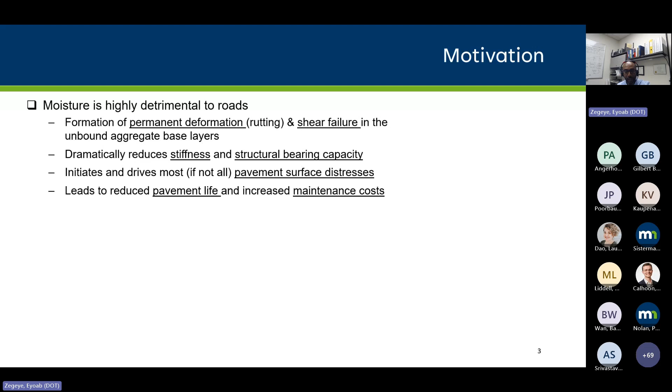The conditions that facilitate moisture damage are unrepaired surface layers, using moisture susceptible unbound aggregate materials, poor design drainage, or not very clean ditch areas. But most importantly, they are also a result of extreme freeze-thaw events, which Minnesota experiences a lot. Lately we're also experiencing a lot of heavy quick rain or flash flooding that flushes out pavement. Most of our pavements don't seem to be designed for this type of fast, quick rain, and we end up losing fine particles, with hydraulic erosion and other problems that lead to pavement failure.

When I speak about moisture damage to pavement, I like to show this video collected at MnROAD. This video is about an experiment done at MnROAD. During the freeze-thaw period in early spring, when the pavement was still in wet condition, or the base aggregate was saturated, they applied traffic loading early in the morning. As you can see in the shoulder area, there's still a presence of moisture in the unbound aggregate, and they have been applying heavy traffic on this road. This was early in the morning, and after a few passes, this is what happens to the pavement.

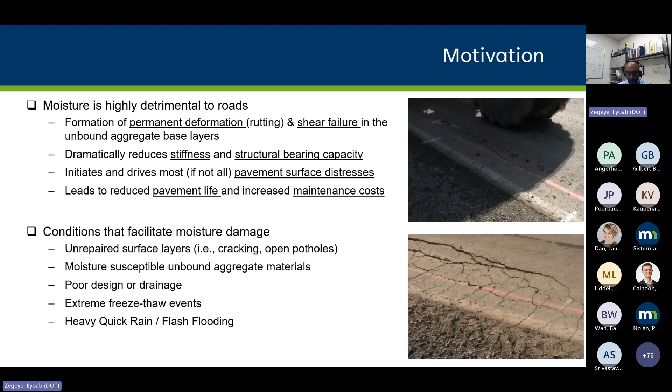When you have these issues, you need to solve the problem, maybe improve the material design or improve the drainage. But there are also some immediate remedies you can do. One is basically controlling the traffic load or restricting traffic in these conditions.

This traffic restriction plan could be periodic. For example, in Minnesota we have the spring load restriction in early spring, in the last two weeks of February or first two weeks of March. Or we can have a winter load increase when your pavement is very stiff - you can exploit that advantage and put heavy traffic on your road.

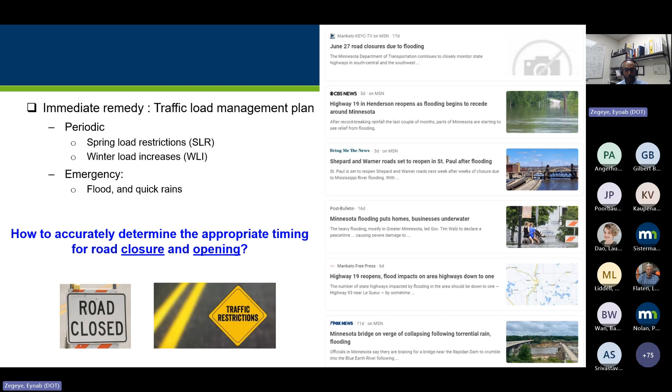But when you have an emergency like flooding and quick rains, that becomes a little difficult. When your pavement is flooded, it's easy to know when to close it, but then it becomes difficult to know when to open it. So the idea we're discussing today is how to accurately determine the appropriate time for road closure and opening.

If you close too late, you may have damaged the pavement. If you open too early when it's still wet, you may again cause damage. So this is the topic of discussion today: how to determine the appropriate timing for road closure and opening, either for periodic cases like spring load restriction, or for emergencies like flood and quick rain.

If you Google flooding in Minnesota pavements nowadays, you'll see that a lot of our roads, a lot of our local authorities, are dealing with this problem - dealing with when to close and when to reopen the pavements. With this slide, I want to share that this is a real problem that a lot of our engineers have to address.

Traditional moisture monitoring tools are in-place sensors, or drilling, coring, trenching. But these are discrete spot measurements - they don't account for spatial variation. They are very expensive to do, and you are also destroying your pavement. They require traffic closure, lane closure. They disrupt traffic and create safety concerns both for workers and drivers.

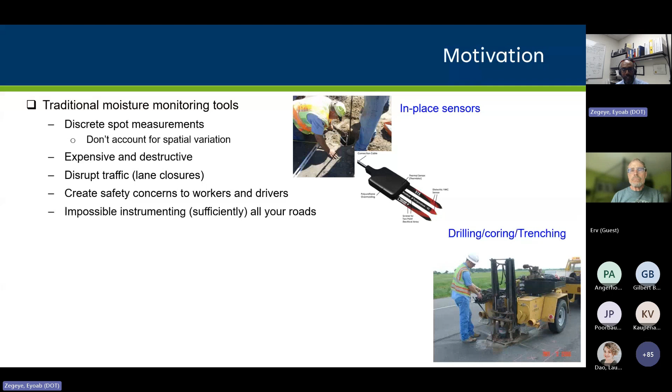As you can imagine, this is nearly impossible to accomplish on all your roads. Even if you put instruments in, it becomes very difficult to have a sufficient number of sensors in all the critical sections of your pavement. They are reliable, but mostly suitable for experimental tests, like MnROAD, where we have thousands of moisture and temperature sensors - but it's very difficult to achieve on real roads.

Because of that, we started discussing: can we use non-destructive testing technology like ground penetrating radar to assess and monitor moisture fluctuation, in this case focusing on base layers, but generally in unbound aggregate layers? Another important part is existing in-service roads - we're trying to collect data on existing roads on the top surface of the pavement, and then extract moisture information about the base, sub-base, or subgrade conditions.

Why? The benefits are, first, this is a non-destructive testing technology. But most importantly, this type of testing provides continuous information on your pavement, and can be quickly applied over long stretches. They are also suitable for repeated periodic evaluation, and they can be mounted simply on a vehicle - you can have a moving vehicle operation, or they can be done with a push cart GPR system.

In this discussion, I personally, and others too, favor the pushcart, because it's a very simple technology, relatively very cheap. Local road authorities can purchase this equipment and quickly use it without having to deal with all the other equipment and details that big vehicles like the Road Doctor bring.

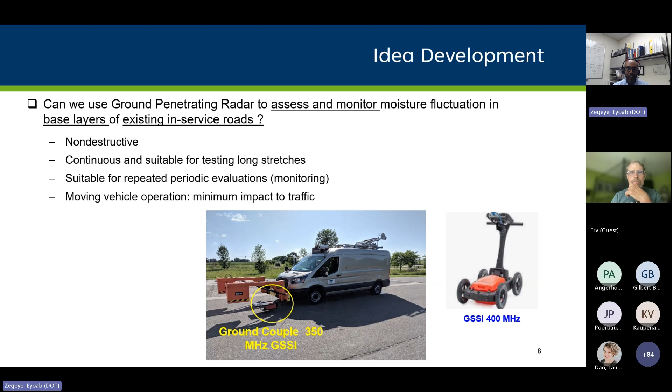So once we decided we want to investigate this, we want to conduct a feasibility assessment, we came up with a plan how to do this. The first thing we did was review MnROAD's subsurface moisture and temperature database, to learn the trends and seasonal fluctuations in our pavements. We also wanted to assess the type of data collected by our sensors, to use as a benchmark to compare with GPR information, and to identify test cells and proper time windows for testing.

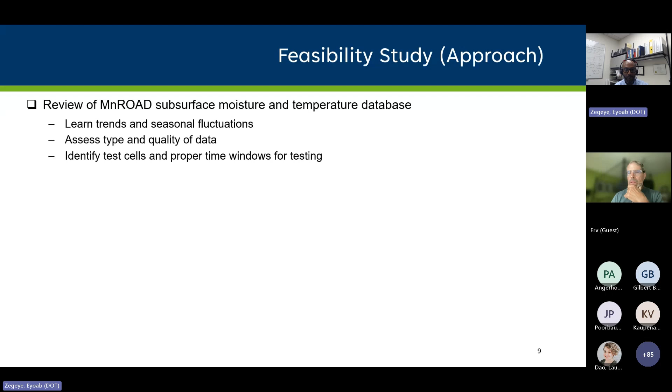Once we've done that, we moved to phase one: data collection and development of analysis procedures or tools. We collected data on different MnROAD test cells, and proposed some analysis approaches for extracting moisture-related information from GPR data. We also compared our GPR data with other non-destructive technologies, such as falling weight deflectometer, to see how GPR information can explain some of the structural adequacy of our pavements.

Finally, we did some validation with a new set of testing and analysis approach. In the second phase, we look at how we can implement this methodology on actual roads - the presentation today is part of that. We want to engage with universities, manufacturers, and road authorities to see how this can be moved into real roads.

We would like to develop implementable testing and analysis plans, connect GPR data with geotechnical and mechanical properties of the road, and finally come up with specifications and analysis tools that can help us manage traffic loads during critical flooding or spring thaw events.

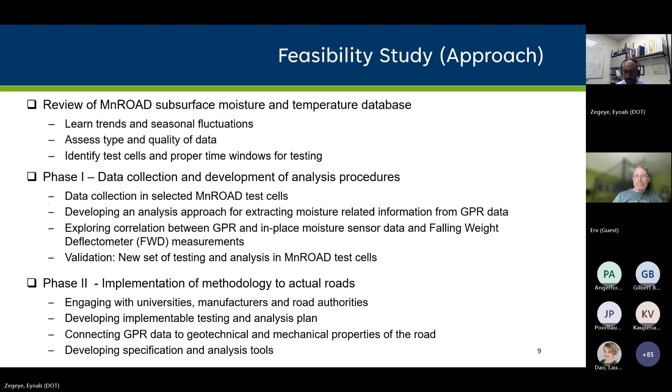So the first part was review of the MnROAD database. For those interested, we've documented that part of the study in a TRB paper. The main takeaways: we looked at data collected in MnROAD cells from 1994 to 2014, specifically at 8 different test cells with different structures.

The first thing we saw is that moisture and temperature in the subsurface follow very closely this seasonal fluctuation - high moisture content during summer, fall, and spring, but it drops almost to zero in winter. Temperature is similar. This gave us an idea of where we are.

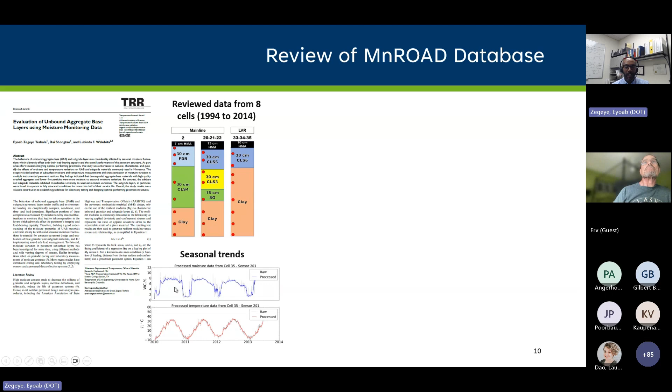From what we saw in this data, if we're going to collect data with GPR in summer or fall, that's something we can measure every month. But in spring thaw or winter, we probably need to multiply the effort. This is the kind of information we use.

The second piece of information: we accumulated all the data collected over many years and averaged it into one year, trying to see how temperature and moisture data changes with depth in the pavement. In this case I'm showing a pavement with asphalt, then Class 6 base, placed directly on clay subgrade.

One thing we saw is that high moisture levels are observed in spring and summer. But the other important thing is that the highest moisture fluctuations are observed far from the surface - most of the time at the interface between the base and subgrade.

The other most important thing is that the top pavement layer appears to warm up earlier in spring compared to the deep layer. This is important because it creates the spring thaw problem: the subgrade is still frozen while the top layer is warming up, creating a water sandwich between the frozen subgrade and the traffic load applied above, which creates a problem.

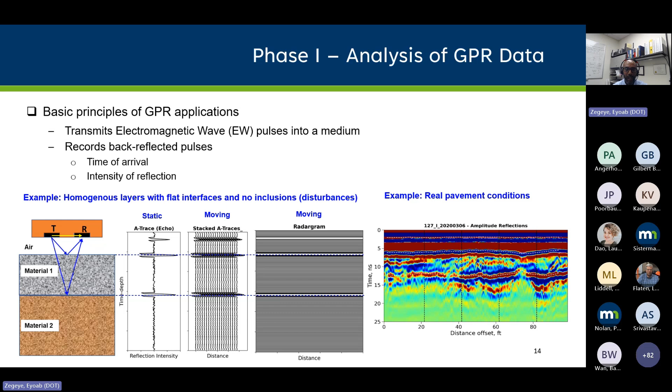In the real world, this is the type of GPR image we receive, where you don't necessarily have flat interfaces. You have a lot of inclusions and other things going on, noise that affects your data. But in any case, when we collect GPR, we are always collecting only the time of arrival and the intensity of reflection.

From that information, we can analyze the data, filter the data, analyze it in time series, in time domain or in frequency domain, and from that extract different types of pavement properties and pavement materials.

You're familiar with the use of GPR for layer thicknesses, density, moisture, and we can also use it for detecting buried inclusions like utilities or other pavement defects, voids, sinkholes, stripping, debonding, or rail tracks. These are the applications we are using on the road sector.

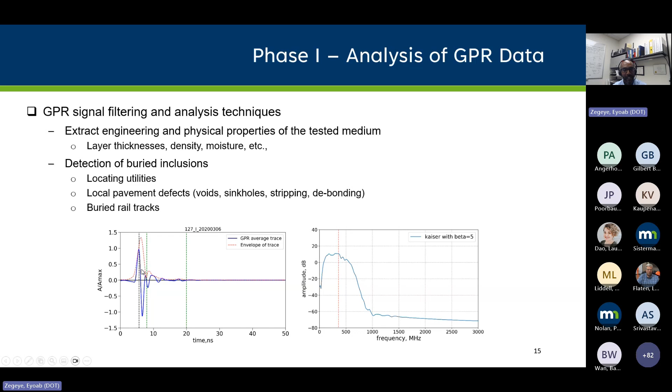So now we decide: how can we analyze the GPR signals to see the effect of moisture, or to quantify the moisture in the pavement? To do this, first we came up with some assumptions and requirements. We need to know the layer thicknesses.

In the case of MnROAD, we knew the layer thicknesses. We verified them with coring, but because this is a control section with very small sections, we knew the layer thicknesses, and we knew they could be assumed to stay constant for the entire test section. Second, we need clear, visible layer interfaces on the GPR.

The layer thickness also needs to remain unvaried between consecutive GPR scans of the same section. So what we're trying to say is that when I collect GPR data on the pavement, whether one time or repeated scans on that pavement, the only thing that is varying is the amount of moisture. Everything else remains the same.

This is the main assumption we needed for this methodology, and we do recognize that this needs to be changed when we try to apply this in a real road.

So here, for example, are GPR radargrams collected on 127 in March and in January. What you see here is because the GPR signal is very affected by moisture.

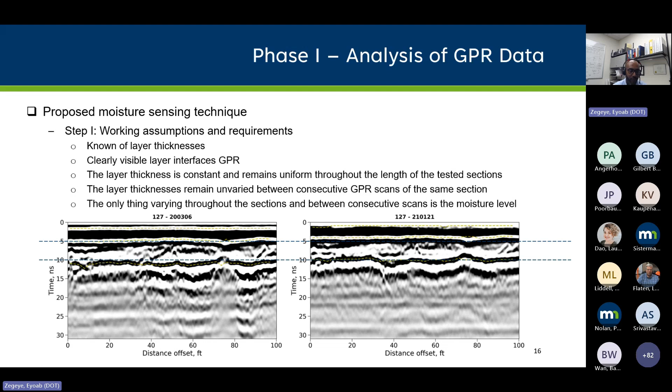So how do we do this? Basically, we created an analysis tool, in this case in Python, to analyze each of the signals collected by the GPR. The analysis consisted first of automatically finding all these peaks and troughs.

Then, because we know the user input, the user needs to tell the tool, okay, around this time window you need to find the AC interface, AC to base, or around this base to sub-base and sub-base to subgrade. So this is a user input. It's semi-automated because there is still a need for a user to specify these time windows where you need to find your interface.

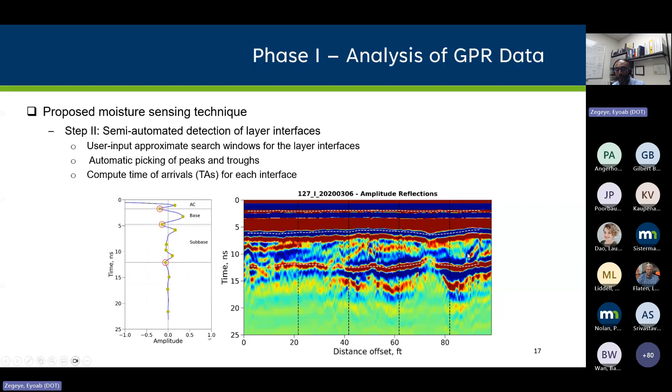But once you tell it that, the analysis tool will identify and find these interfaces. Later, Anshul will provide a demo of this analysis tool. But for now, just remember that first you need to find these interfaces, and once you find them, you get the time of arrival of those interfaces.

We also agreed that we know the thickness of the layers. So then it becomes a trigonometric problem. I know the distance, I know the time of arrival, and the time of arrival can also be written in terms of distance by multiplying the time of arrival by velocity. By solving this equation, you can come up with the layer velocity, the velocity of propagation, or how much time the signal spent in each of these layers.

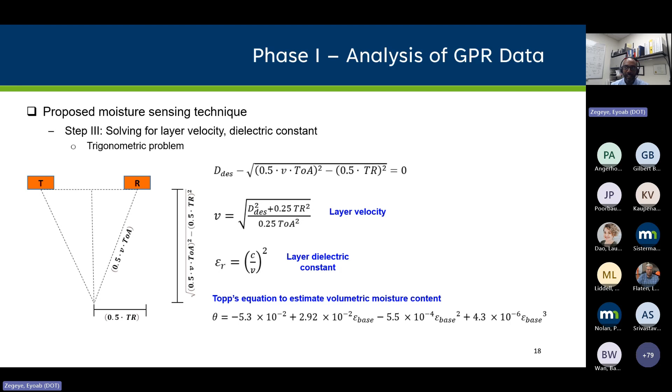Once you have the velocity, you can also come up with the dielectric constant of these layers. And when you have the dielectric, you can use Topp's equation to convert it to volumetric content. I must say Topp's equation was developed for clay material, for subgrade material. In this case, we applied it also for these unbound aggregate layers. As you will see later, it provided good results, but this definitely needs to be addressed. The Topp equation is not necessarily something that can be applied universally, in my view.

So I will shortly discuss the result. But before the result, what other things we saw in the analysis of the GPR images that we collected over the years for almost 2 years?

One thing we saw, for example, the clarity of the GPR image was much stronger during winter time, at least for the deeper layers. But in the top layers, because now we have the GPR signal traveling at very fast speed, when you have a thin AC layer, in this case only 3 or 4 inches of AC, it becomes very difficult to see that AC interface in winter.

The other important thing we saw is that although in all of the cells we were able to clearly see and detect the interfaces, in one of those test cells, the 728, we were unable to see one of the main interfaces. Because, as I said, the assumption for this analysis procedure to work is that we need to clearly see the interfaces. In this case, the 728 was not considered further for the study.

But the insight we took from this cell was very important. So we kept investigating why did the GPR show this badly compared to, for example, here. And we found out that cell 728 underwent several issues during the 2017 MnROAD construction operation.

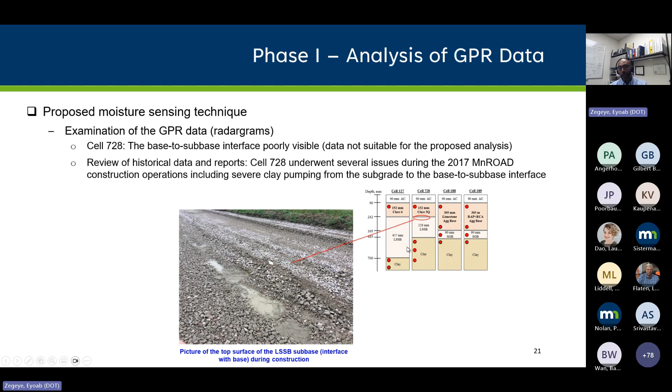And this was quite a plausible reason for us. This is why we were seeing that this interface was completely difficult for us to see through the GPR, because it seems like it has been contaminated with clay material, which is known to retain a lot of water and cause other issues. So this was something that we learned throughout this effort.

The other thing we saw also, because as I indicated before, there was in parallel this NRRA, a very interesting NRRA study. So we saw that some of the materials had also high recycled material, recycled aggregate-based materials.

Our general observation is if you have a high amount of recycled aggregate base, like here in 189, but at the same time you also have good drainage, then that recycled aggregate material is not going to affect your GPR much, because most of this recycled aggregate base also had high mortar content, high cement content. But when you don't have proper drainage and you have high recycled aggregate base or mortar content, then your GPR will also be affected by that.

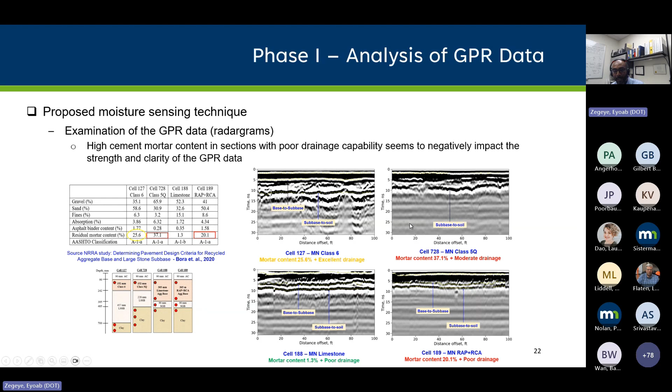And then finally, the result. The results were more than we expected. Here I'm showing dielectric of the base collected from the in-place sensors compared to those of the GPR. In all cases, you can see that the correlation was very good.

Nevertheless, we thought that the GPR measured dielectrics appeared to be smaller than the dielectrics collected from the in-place sensors. We are not necessarily very concerned by this, because first of all, the dielectric content measured by the GPR is averaged throughout the entire section, while the in-place sensors give spot measurements. Second, the in-place sensors also go through calibrations and many other things, so they are not necessarily the true measurement of the true moisture or dielectric.

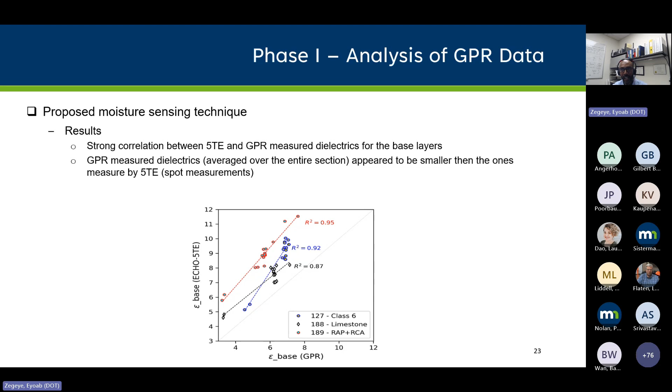We also tried to focus on what happened in the last weeks of February and first week of March. One important thing we saw is that both the in-place and the GPR moisture data showed that you don't necessarily have a spike of moisture content in the pavement. For example, if you have good drainage, like in cell 127, almost nothing happens.

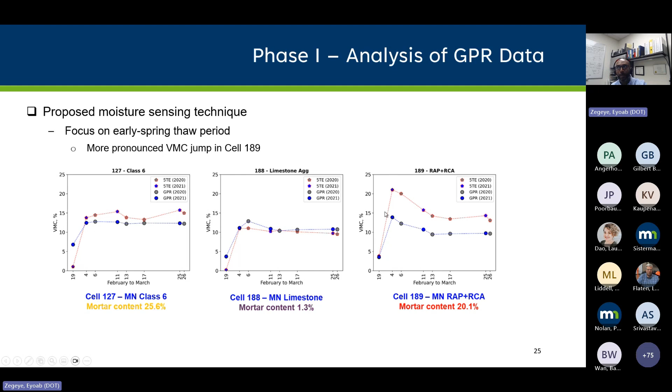But lastly, the most important aspect of GPR or non-destructive testing compared to in-place methods is that they can now be used to cover longer stretches. This is the GPR volumetric content of cell 127, around 30 meters, around 100 feet.

You can measure the entire section, you don't necessarily have only one spot measurement. And if you can collect an entire section, then you can also see some critical section where you may have a problem that you need to address.

The other thing, you can also easily use it as a frequent GPR monitoring. So for example, if I come here in January, you'll see moisture content is very low in the base aggregate, and then it goes up in springtime. So these are the two main aspects of this technology, why we think it should be implemented on our roads.

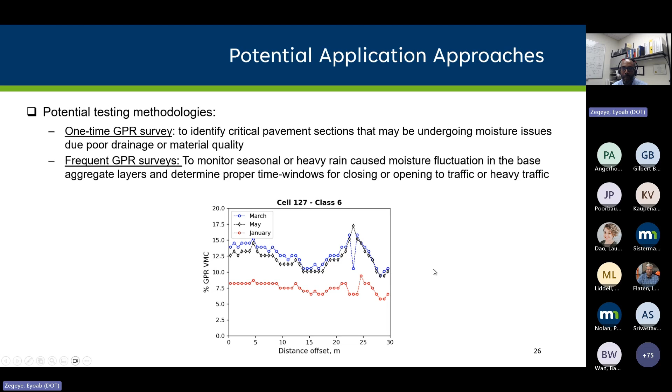Before I go to the final implementation plan, I'll ask Anshul if he can show how this works.

I'll start off by talking a little bit about the algorithm that we've made, just a basic introduction. We use Python to write a script that takes in the data, pre-processes it, and does this analysis for us. We used standard libraries that Python offers, such as NumPy, Pandas, and SciPy. That ensures we have the most optimized version of our code, so it's very efficient.

But what we quickly realized is that not everyone wants to or is able to look at 1,000 lines of code every time they want to do this analysis. So our idea was to make a GUI, a user interface that lets people use the algorithm in a much more user-friendly way. For that, we used this Python library called Streamlit that offers a web-based GUI using that algorithm in a much more user-friendly way.

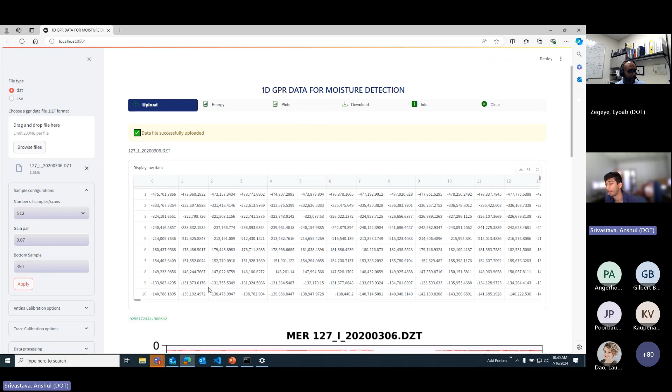So once you click apply, this is what you see - this is the energy ratio diagram. You can see just little hints of the interfaces over here already. And then here, once you apply the gain, this is the exponential gain version of the radargram. Now you can see the layers really starting to pop out.

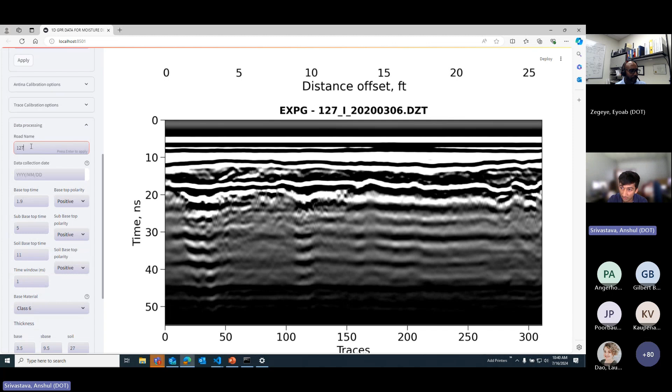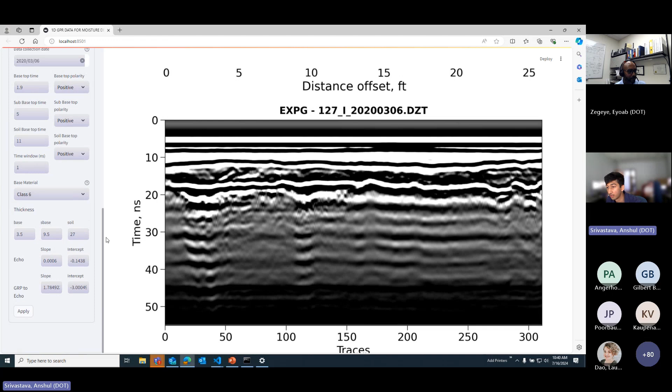The next step, what Eyoab talked about, was finding the interfaces. This is the semi-automatic version of it, so this is some of the info you have to give in - given the road name, 127 in this case, specify the date, which is already up here, 2020, March 6th. This is just for record-keeping purposes, makes it easier when you have to look at data you already processed. Then you click apply and go into plots.

This is what the radargram looks like initially. These dotted lines are what the algorithm thinks are the correct interfaces, but obviously we need to give it some more input to make sure we have the correct interfaces.

This follows the basic principles of a heat map - red is positive polarity, blue is negative polarity. So if you look at it, I'd say this blue section looks like a much better interface than this red section. Right here, where you give all these inputs, this is the base top time, so this is 1.9 nanoseconds, and this is the polarity of it.

Now, I think a negative polarity would give a better interface, so once I change it to negative, there we go, the program recognizes that, and now you get a much cleaner looking interface. Do the same thing with sub-base.

The time looks fine at 5 nanoseconds. I just want to switch from positive to negative. And there we go. So now this looks like a much cleaner radargram. You have the first interface, second interface, and the third interface.

Once you're satisfied with that, now you're going to have the result table basically. That gives you all of the important values that you want to look at. So this would be the time of arrival from base.

That's averaged out for the entire test cell. That's the time of arrival from sub-base. It's from the soil. And then once you have that, you calculate the velocities at each of these points. So this is the AC velocity, base velocity, and sub-base velocity.

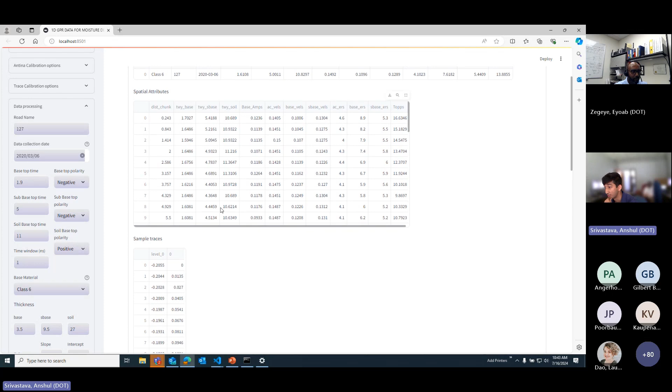That's something that not other methods offer. So that's what that table looks like. Then you also have these plots.

So this shows the 2-way time to base and how that changes over a set distance. This shows the 2-way time to sub-base and how that changes as you go along. And then finally, that's the base amps.

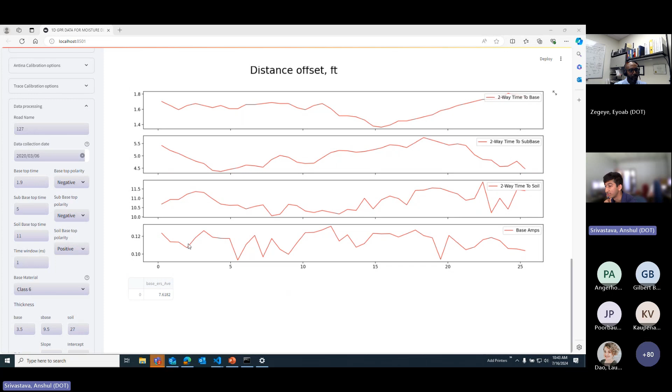So yeah, that's basically how this app works. And once you're done with one data set, you just click clear, go up there again, and then you can add another file. We'll just repeat the process as many times as you want.

Yeah. Thank you, Anshul. Yeah, absolutely.

So I will go back to the presentation mode. I don't know, can you see now? You see? Is that right? Yes, we can. Okay, so thank you, Anshul.

So this is what we've done here. By no means do we think this is the best or the perfect solution, this was a feasibility study. We wanted to see if this can be done and to start this conversation with other stakeholders, with manufacturers, with university, who have much more experience than us in doing this. But we definitely recognize that we are blessed to have the MnDOT testing facility here that we can go out and test. We do have the GPR antennas. We wanted to try this out and show that it can be done.

And then the next step is, okay, we want to encourage this type of conversation. In fact, I thank you, Lauren, because this meeting came at a very interesting time for us too.

So if you want more details of how we analyze the data, the results and everything, again, we documented that also in this other paper, the TRB paper. Another important documentation is also the paper where we wrote to compare the GPR data to falling weight deflectometer, because that's important. Now that you have GPR data, it tells you moisture level, but for you to open the road or to close it, then you need to tie that to some structural adequacy of the pavement. So we did also that study.

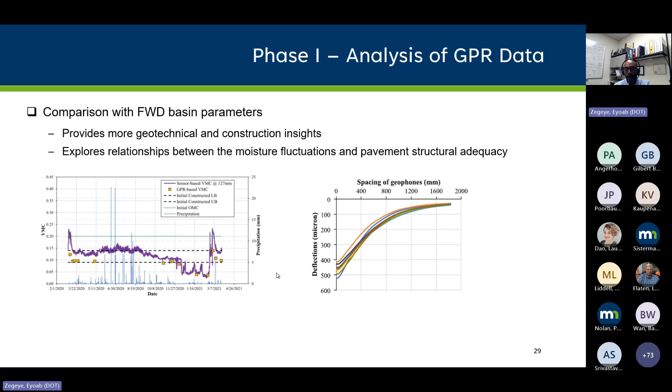But we also looked at the FWD data. Interestingly, what we saw is known - when you have high moisture level in your pavement system, your pavement system should be weaker, softer. That's what we saw from the moisture content from the GPR and also from the in-place sensor. They showed us this is BDI - basically the FWD basin parameters mostly associated with unbound aggregate layer, looking only at the sensor deflection data far from the center plate. So this was another encouraging, promising result.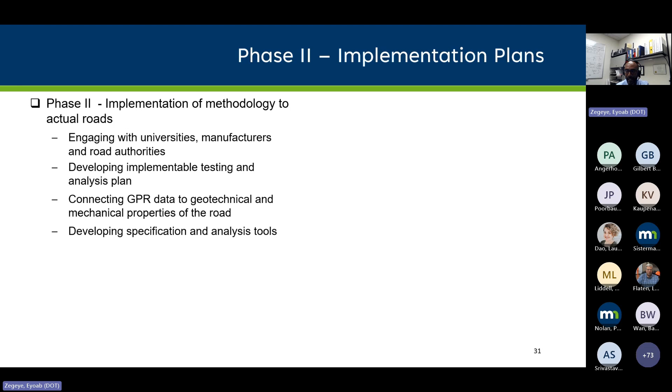So now we are at the second phase, where we're starting to think about how to implement this methodology in actual roads. The first step is engaging - this is what we are doing now, engaging with you, with universities, with manufacturers. The second is working with our local road authorities to come up with implementable testing and analysis plans, connecting GPR data to geotechnical and mechanical properties, and then developing specification and analysis tools. One thing we did: we recently submitted an idea which has been received very well at MnDOT and LRRB Academic Transportation Research Program. If this idea gets selected, it will be transformed into an RFP so other people can join this discussion and contribute. Here is the IdeaScale link - you can look at this QR code, read more, and try to engage in this type of conversation.

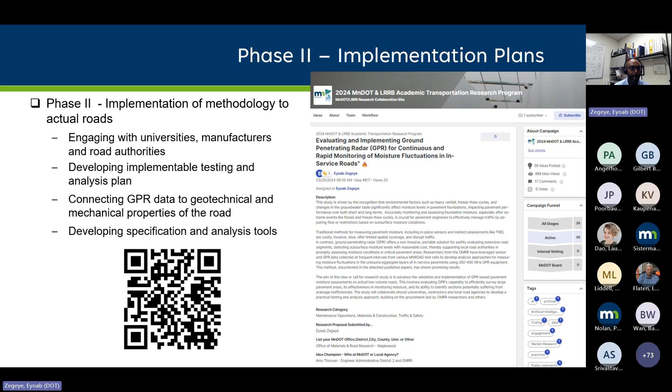So finally, the main takeaway - this was a feasibility study, mostly to see if this is feasible, but also to encourage and initiate discussions on using NDT technologies to measure moisture level in in-service pavement systems. This study demonstrates the feasibility of using GPR for rapid and continuous evaluation of moisture condition in unbound aggregate layers. It outlines the principle of an algorithm for estimating moisture content in the base layer from GPR data collected on top of a bituminous surface using a single offset low frequency GPR antenna. It also defines the requirements and working assumptions used in this study, and provides valuable insight on the effectiveness and limitations of GPR for investigating pavements with varying drainage and moisture retaining capabilities. Finally, it puts forward a plan to engage with universities, research institutions, and manufacturers to further refine the methodology and implement it on real roads.

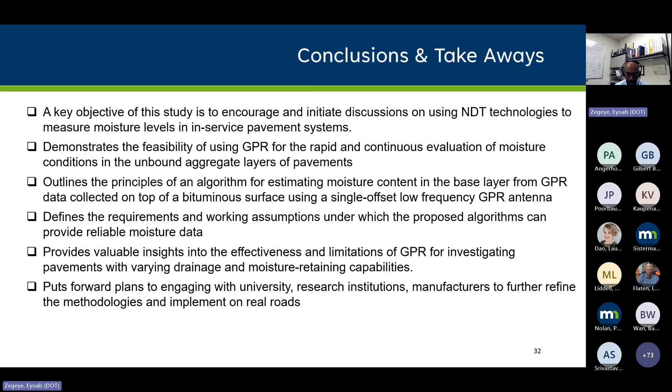So with that, I thank you for the attention so far, and if you have any questions for me or for Anshul. Thank you, Eyoab. We do have a couple of questions in the chat, and I see one more popped up.

This was from a little bit ago, but Jay asked how you decide on the dielectric constant in the GPR machine, considering that the moisture is unknown. At the beginning, we didn't know. We used the analysis I showed before - I explained the analysis tool, the trigonometric problem. Once we solved that, we correlated or compared it to the actual in-place sensor moisture data, and we saw that it almost matches or captures the same trends. They don't necessarily have the same values, because both have their own assumptions and defects, but the most important thing is that they are very close and matching, capturing the trends very well. Does that answer your question?

Right, it's Jay - yeah, if Jay is still on, you can feel free to unmute. Thank you for the reply.

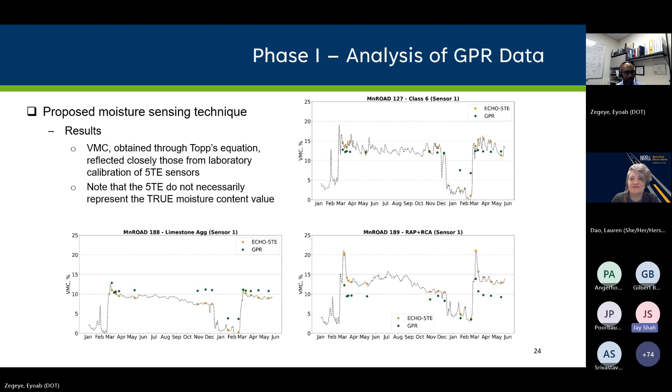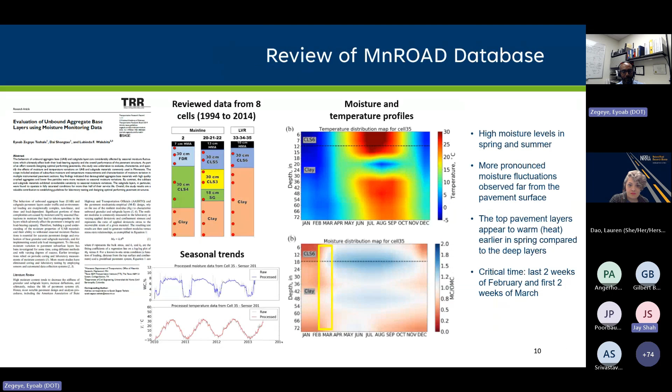Not necessarily, I thought it would come a bit later on. So one more question I have is, what's the thickness of your first base? My understanding was you were changing the dielectric constant in such a way that the first reflection always matches the distance of that base from where the reflection is coming. So since you said that reflection point can change at different points, you don't know at what point you'll get that reflection from the moisture. So how do you tackle that?

That's a good point. What you're trying to do is get the layer interfaces. Your exercise is trying to find the layer interfaces. In this case, we are assuming that we know the layer thickness, because in this case in MnROAD, we know them. I'm trying to find here the picture I showed earlier.

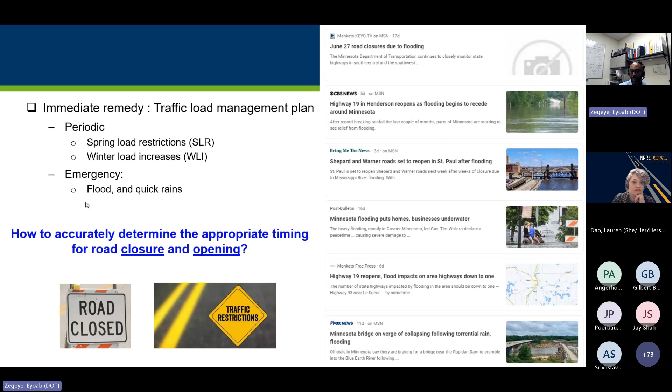Anyway, so we know exactly, here we go, we know exactly what are our layer thicknesses. We went there, we checked to make sure these are the layer thicknesses. So what we're saying is, if your GPR signal travels in, let's say, 8 nanoseconds in a distance that you know to be 152 millimeters, then what is that dielectric? So that's doing the backward analysis, back calculating instead of forward calculating.

So since we know the distance, we assume it to be flat and always consistent, uniform. That's one of the assumptions. So if you have a layer thickness of 152 millimeters, and you collect from the GPR and see that the signal travels in 8 nanoseconds in that layer, then from that you can calculate the velocity and also the dielectric.

In fact, this was the main assumption we need to revise if we want to implement this on a real road, because as you indicated very well, in real roads you don't necessarily have uniform thickness. You have huge variation, thickness variation. So one challenge would be implementing this on the road when we know the thickness is variable. How do you implement this?

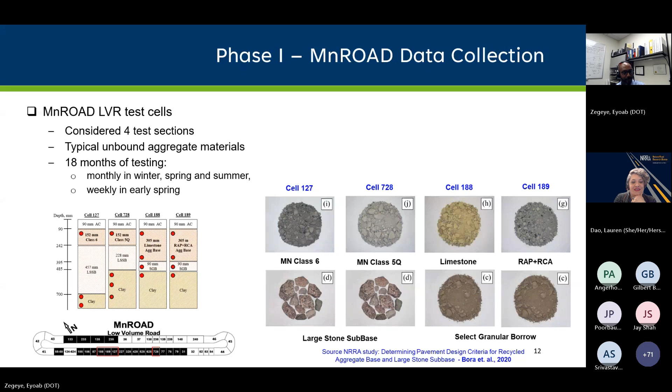Another question was asked, especially for winter and early spring GPR measurements, what's your approach for considering ice, given the differences in dielectric constants of ice and water?

Both water and ice really impact the GPR. Ideally what you want to see is that the ice or moisture is contained only in one layer. As long as it's contained in that layer, you'll be able to see the differences, and the interfaces will show clearly. We have not necessarily collected data when there was ice in the top AC layer. We collected definitely when the subgrade was frozen, the deeper layers were frozen, and we did see that our data when there was ice was clearer, like I showed before.

I'm assuming because when there is ice, your GPR signal is traveling fast, there's no issue, and as long as that ice is contained in one layer, you're able to look at the interfaces. The problem is with moisture, especially if you have moisture at the surface level, then it becomes very problematic. When there is moisture at the surface level or in the AC, we didn't collect data, we avoided it. Even when we had ice or snow on the asphalt pavement, we saw that created problems, so we didn't collect data on those days.